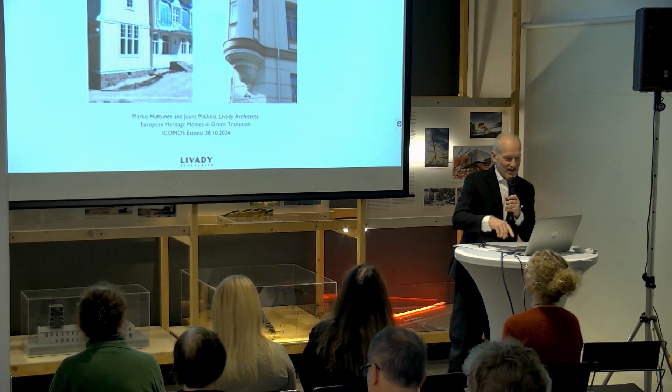Thank you, Henry. And also, thank you very much, Ulrika and Tina, for what you told about the legislation in Sweden that covers pretty much Finland as well. So we don't need to go through all that, but a little bit about the legislation anyway on ventilation in Finland at the moment.

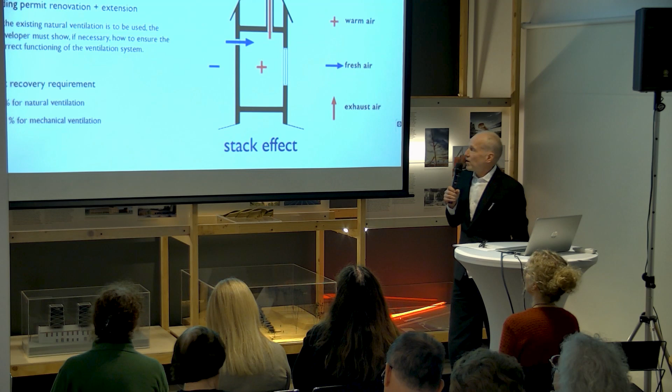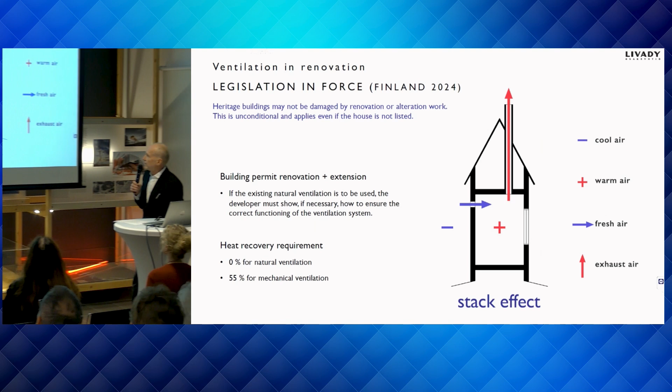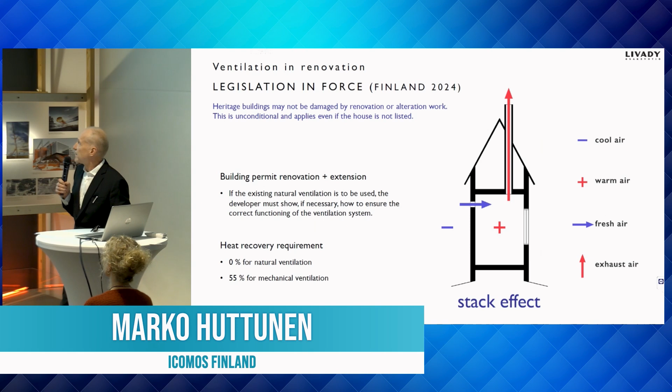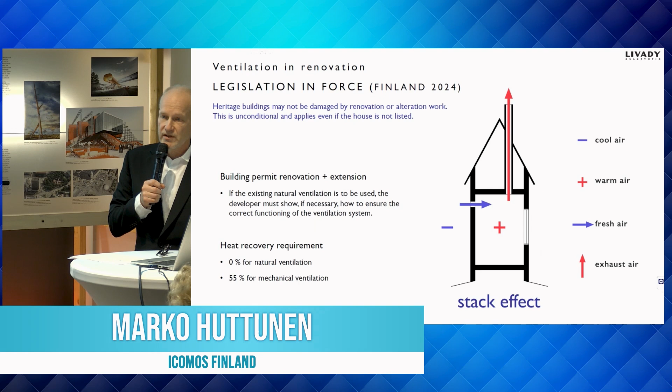Maybe first this graph here. What I mean when I'm talking about natural ventilation is the ventilation system based on stack effect. That means the air starts to flow when there is a difference in pressure, and the difference is made with the difference in temperature and height. Simple as that. And that kind of system has been used in Finland until the 1950s, and it developed into quite a good system. Then it was forgotten for some decades, and now it's coming back again.

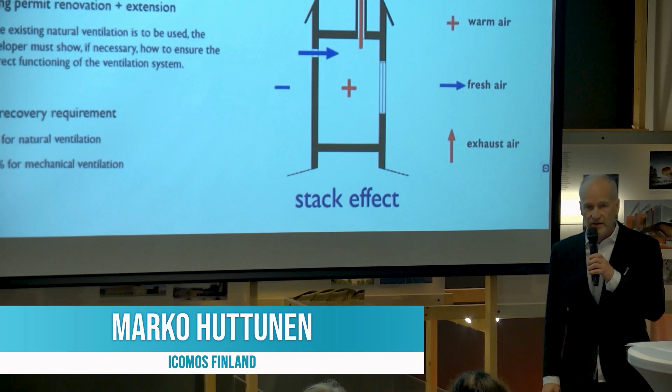And the benefits of this system are considered so high that, what we have here, maybe Sweden did not have, is this heat recovery requirement, 0% for natural ventilation, because otherwise it's considered such a good system.

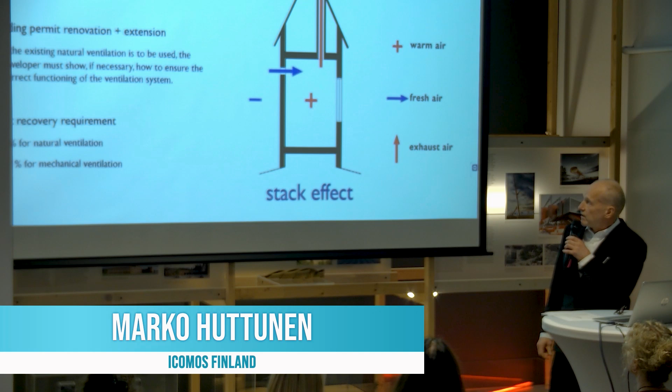And then there's a bit more legislation. So if you are doing a renovation in your building and it needs a permission, and if you have an extension, you can still use the old system of the original house. You probably need to show that the ventilation is working, but that's all. And there's no heat recovery requirement for the extension either.

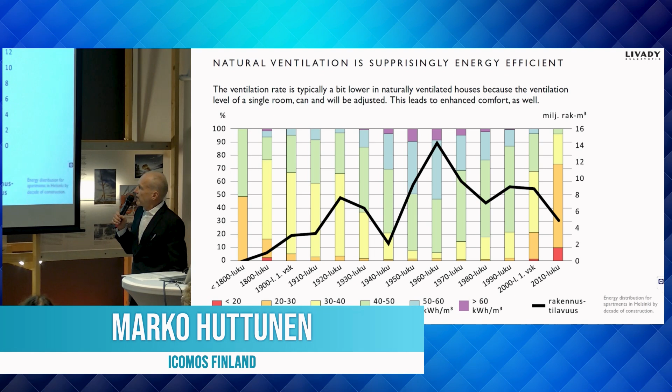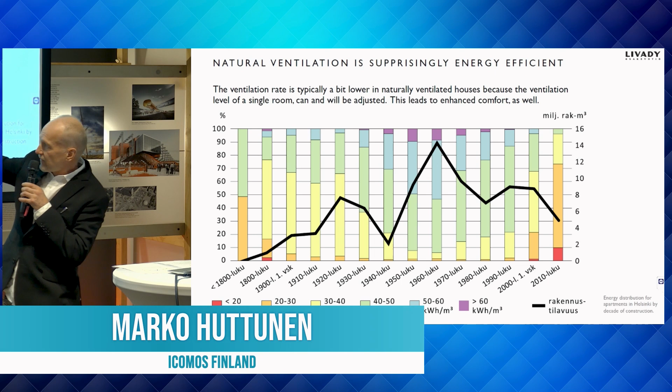This graph here shows the buildings in Helsinki. If you look at the black curve, it tells you how many buildings have been built in each decade, and you can see that most buildings we have are built in the 1950s, 60s, 70s. If you look at the colors, they tell you how much energy they actually use - that's not calculated, that's the real use. What you can read there is that these buildings that we have most also use the most energy. And if you look at the heritage buildings, they actually are quite energy efficient already - we are reaching that energy efficiency just now again. So they are quite good.

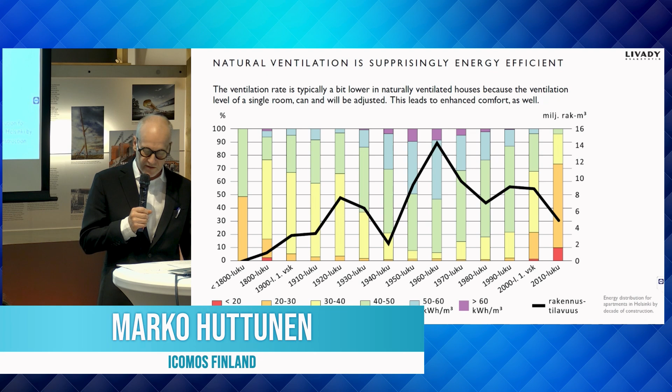And natural ventilation is surprisingly energy efficient. I guess that lies on the fact that when the cool, fresh air comes in, it makes the users turn the valves down, resulting in more appropriate ventilation. And this kind of control by the occupants also leads to enhanced comfort, which is of course very important as well. Whereas in mechanical supply exhaust systems, unnecessarily high airflows are usually not noticed.

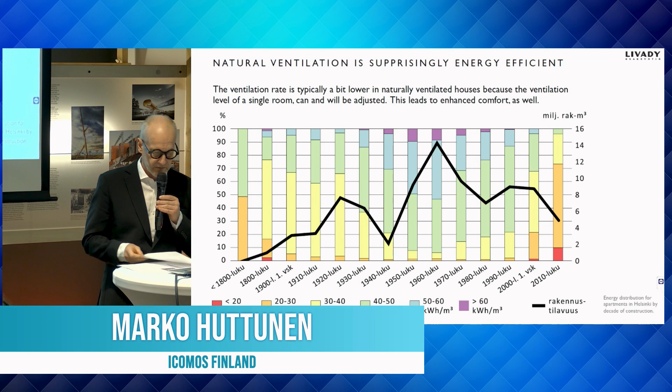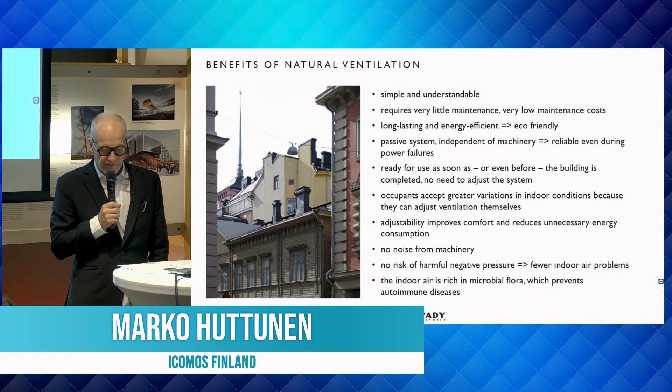Benefits of natural ventilation, they are many, and you can look at them there - I won't go through them. We think that energy efficiency should also be considered as a question of long service life and resilience, and I think, as we all know, a long-lasting building is always ecological. The longevity, fault tolerance, and maintainability must never be compromised, whereas in mechanical ventilation systems they often function incorrectly, need constant professional maintenance, and remain short-lived.

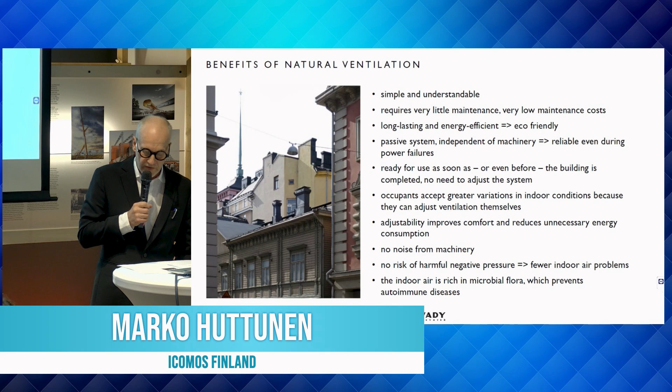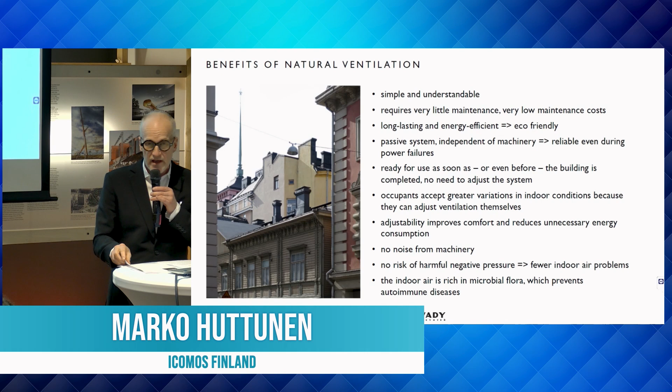And for these reasons, when we design houses - especially when we are designing dwellings or residential buildings - we use only natural ventilation, because we find designing mechanical ventilation irresponsible in these cases. Designing natural ventilation requires expertise, but luckily there is a wide range of positive experience, good examples, and now also some handbooks. And now I let Julia go to our topic: restoring heritage homes with natural ventilation.

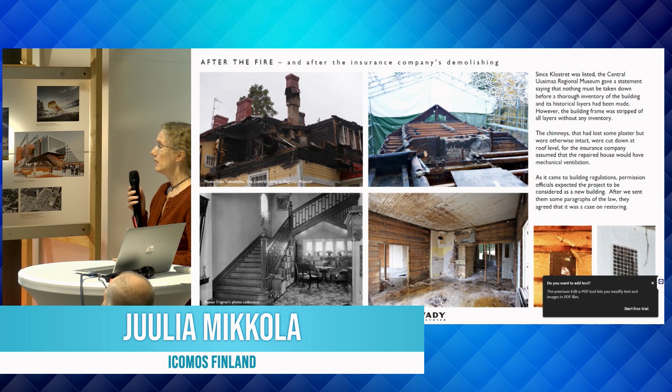And then renovated. The house was listed in the town plan, and hence the responsible museum gave a statement saying there must be a thorough inventory of the house, but that didn't happen. Instead, the house was stripped of all the layers that there were, and the chimneys that had only lost some plaster in the fire were cut down under the roof level because the insurance company was sure the house was to have mechanical ventilation.

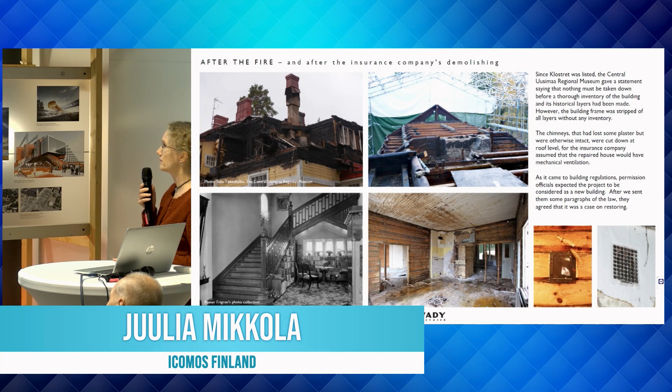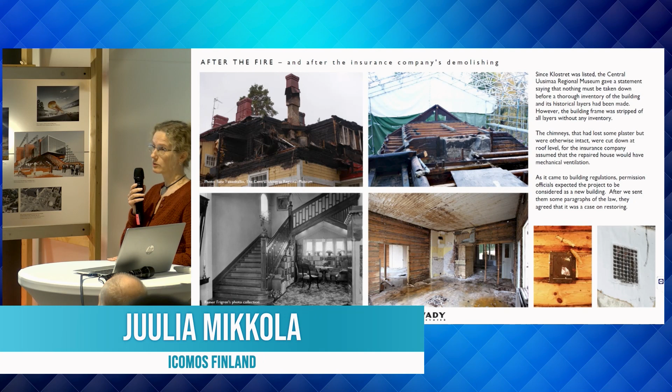Here we can see how the house was originally and how it looked after the fire. We had some problems with the permit officials because they were at first saying this is a new building when it's repaired. Then we sent them some paragraphs of the law and they agreed it's a case of repair.

The principle in ventilation was that we kept the original room-by-room system and improved it by making new openings on the walls, taking care that every room got enough supply air.

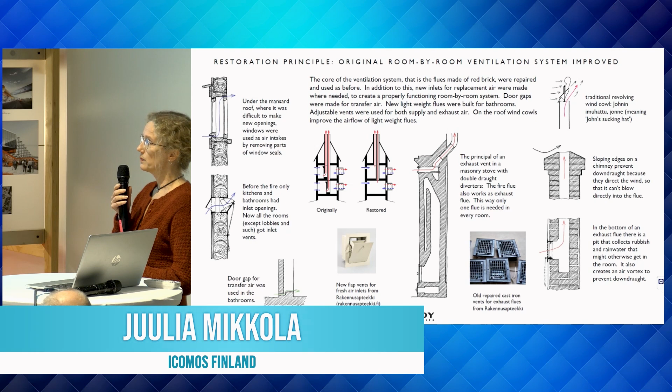We were aiming at having old-fashioned or traditional flap vents in every room, but there were some rooms under the mansard roof where it was more difficult to have vents. So we used the windows as a kind of supply window system, leaving out pieces of window seal.

You can see how the system was originally. Every room had a fireplace. When the house got central heating, some of the fireplaces were taken down, but some were still left. The traditional way is to have only one flue for every room except kitchens.

Here we can see in the drawing the principle of a fireplace used also for exhaust air. The fireplace has double draught diverters and a vent for air in the upper part of the oven.

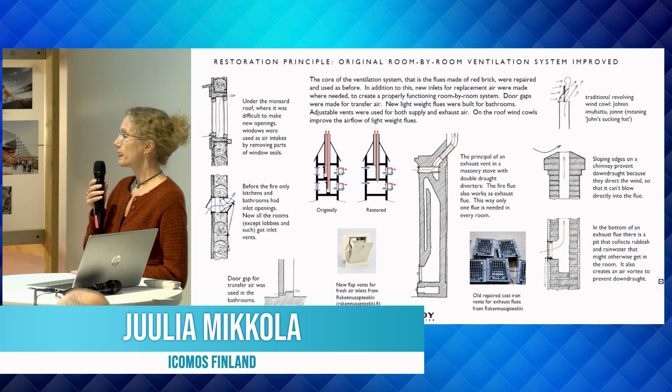The flap vents used for the renovation were new, but at the time we couldn't buy proper exhaust vents, so the ones we used were recycled from older buildings.

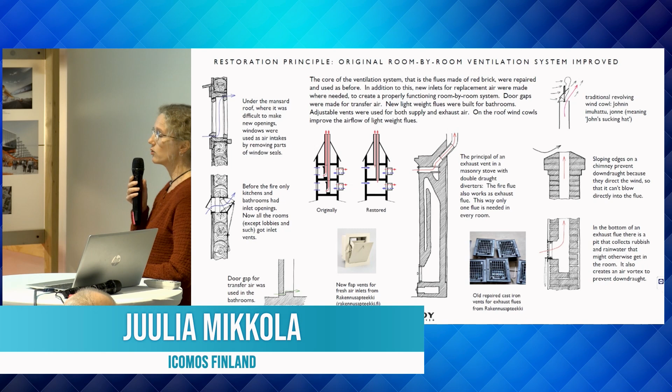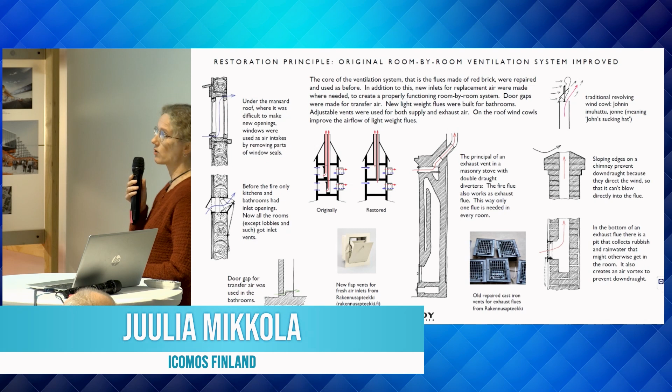On the right you can see what was done with the flues. The chimneys that were bricked up again were using the old shape and the principle of directing the wind so there would be as little downdraft as possible. The flues were to have pits that collect rubbish and rainwater.

With the floor plans, we tried to combine all the rooms that were divided earlier to make good-sized rooms, having an old brick flue for every room. We also made sure we were using every flue there was already in the building.

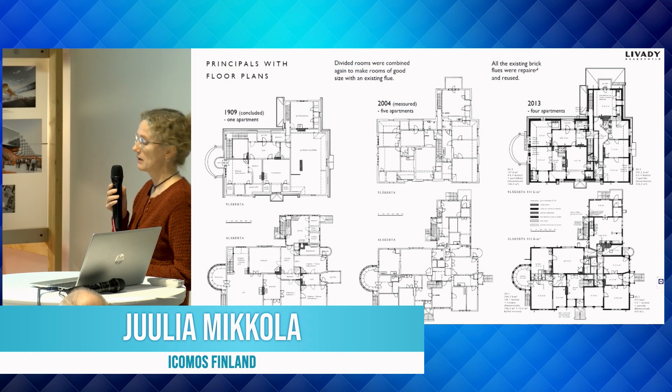For bathrooms and such, we had to build new lightweight flues. Here you can see drawings of the chimneys and the chimney stacks.

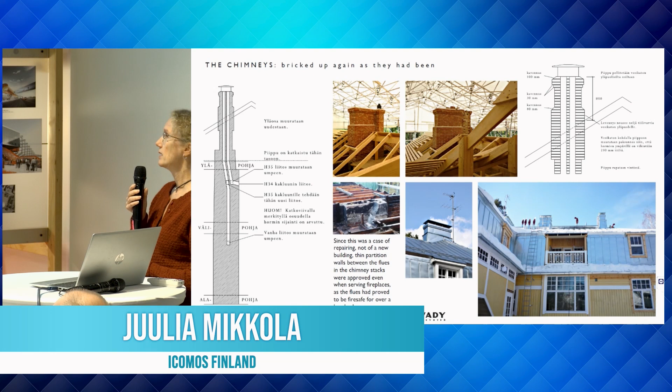Since this was a case of repair, we didn't have to follow the fire regulations exactly, because the old thin partition walls in the chimney stacks had proved to be fire safe over 100 years.

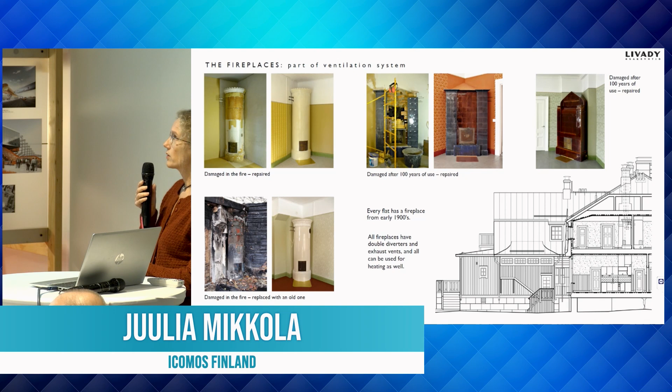Here we can see the fireplaces that were and still are part of the ventilation system. Most were repaired. One was damaged so badly that it was replaced with an old fireplace.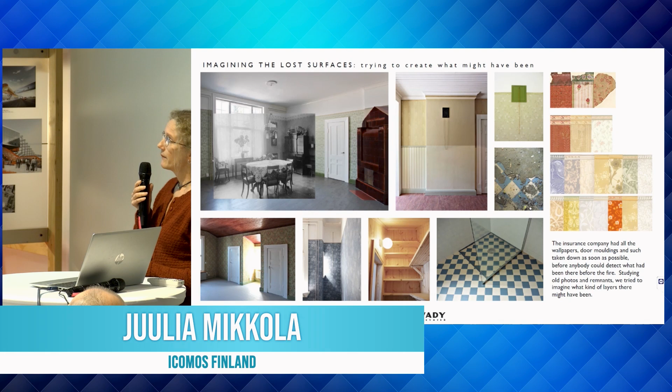Because the house had been stripped of all layers, there were only small remnants. We tried to create the feeling, imagining what might have been there in the house originally.

This is the second example. It's a stone house, built a bit earlier, finished in 1880. It was built by a wealthy merchant to be his home, with a shop in the corner, and a restaurant and wine shop in the cellar.

The house went through a lot of changes in the 20th century. In 1959 it was turned into a department store, and all the windows were changed. You can see it looked quite different.

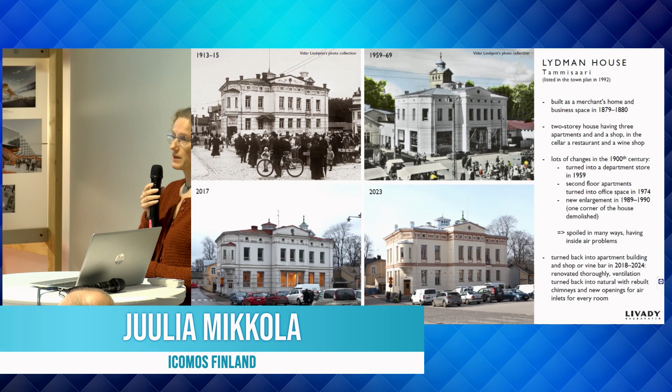Then it got, luckily, a new owner that wanted to make it apartments. Again, it had been office space and shop before that. It was renovated thoroughly, having again natural ventilation.

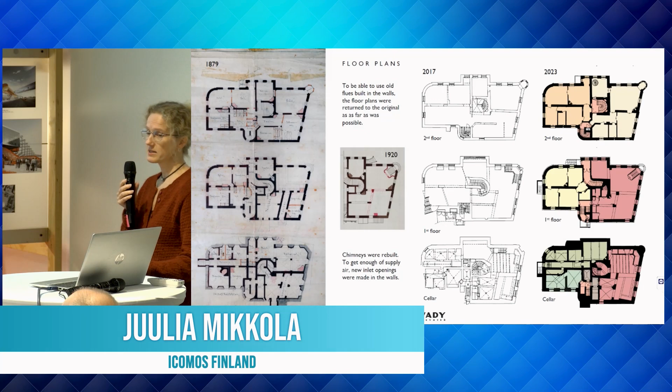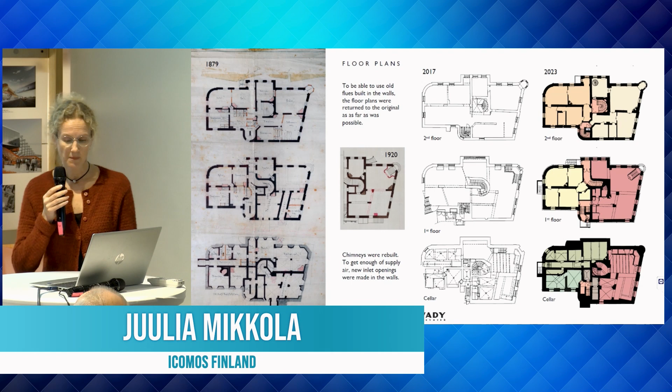Here we can see the floor plans, and in this case we were building back the walls that had been there because the spaces had been more opened than divided. The old chimneys were rebuilt to create again a room-by-room system.

This house originally had no inlets, so they had to be made for every room. The shop was designed to also be able to work as a wine bar for 30 people, so the business space has 6 flues and 6 inlets.

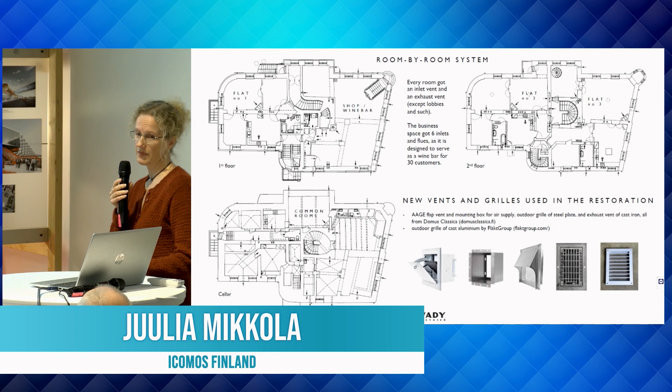At this phase, we were able to use new vents and grills. The exhaust vent looks exactly the same because it's made after a tradition, but it's completely new. It's of cast iron. Close to the ground level, we used cast aluminium grills that look quite much as the old ones that would have been of cast iron.

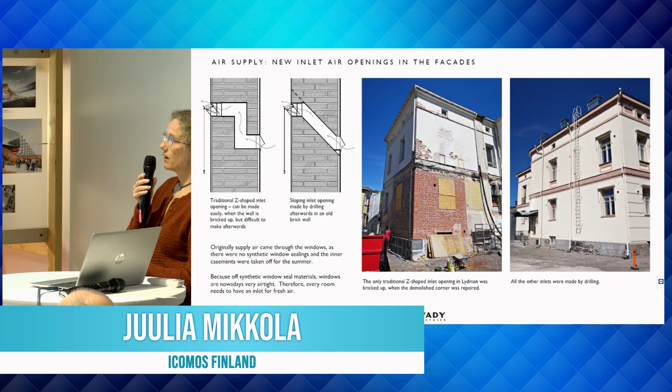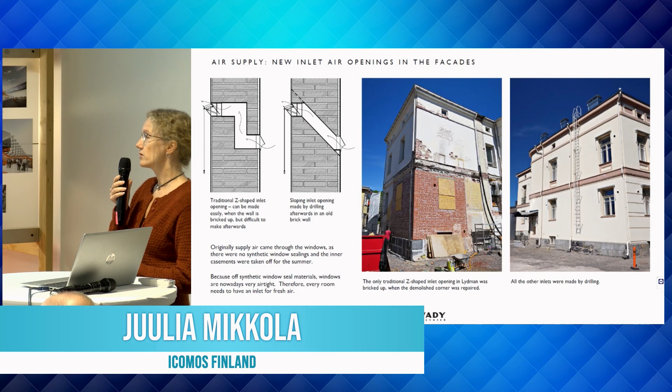On the left, you can see a traditional Z-shaped air supply. This kind of opening in the wall is easy to make when you're bricking up the building, but when working with an old existing wall, you have to drill the holes so they look a bit different. In the building there was a corner where an enlargement had been demolished, and there we could make one of these old-fashioned inlets, but all the others were drilled on the facades.

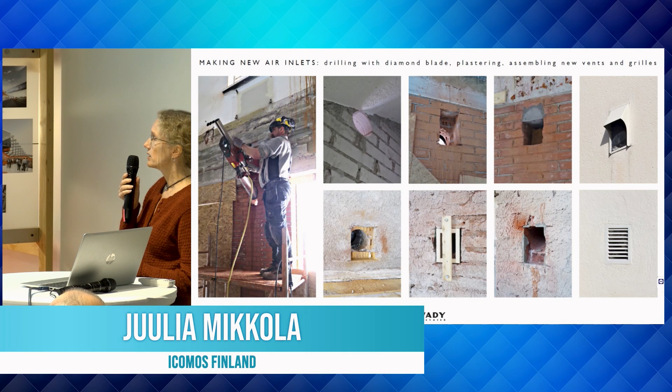Here you can see how it happened with a huge machine having diamond blades. There are many phases: first the round hole, then you make it rectangular on the inside and outside, make some patches and render it, and then assemble new grilles and vents.

Here we see the original system not having any proper inlets. Actually the windows, in the old-fashioned way, worked as inlets because there were no synthetic window seals, so every room got supply air through the window, either unintentionally or by opening it. When the house was turned into a department store, it got mechanical ventilation with only exhaust.

At that time most of the chimneys were taken down, so there were only 6 left when we started to plan. The remaining chimneys were in very bad shape, and the original crowns had been taken down and replaced with a concrete slab.

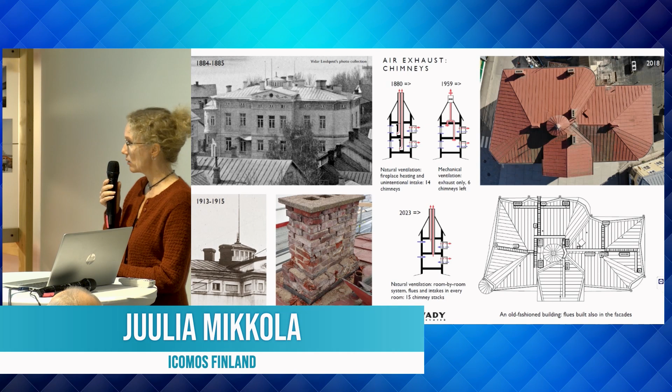Again, we designed a room-by-room system with flues and intakes in every room, and built back chimneys so that now we have 15 chimneys in the building.

The old flues were studied carefully. The green color shows which part might be used again. Mostly they were in rather bad shape.

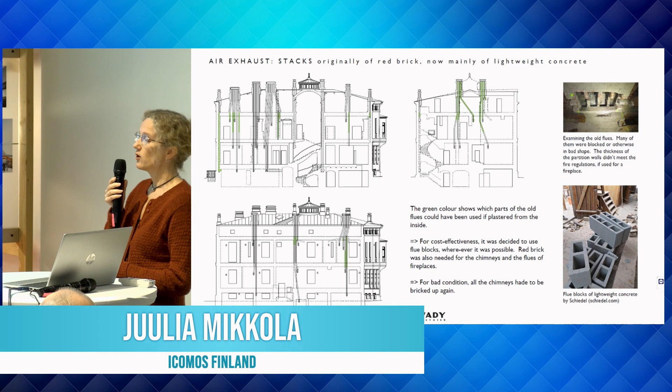For cost effectiveness, it was decided not to use red brick, which was my first intention. Instead, we used lightweight concrete flue blocks.

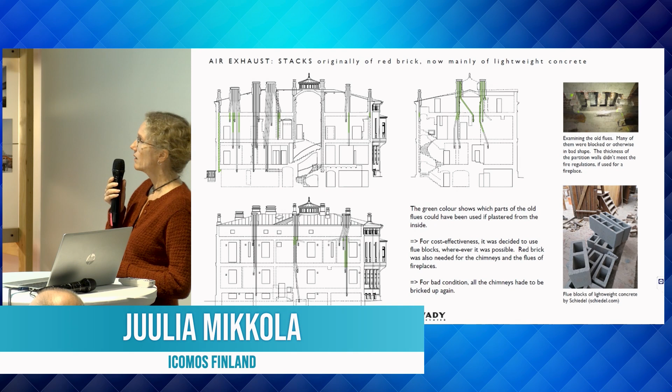Of course, we had to brick up the chimneys again. Here you can see the flue blocks built into the house. First, space was cut for them in the walls, and then they were bricked up, coming through the walls.

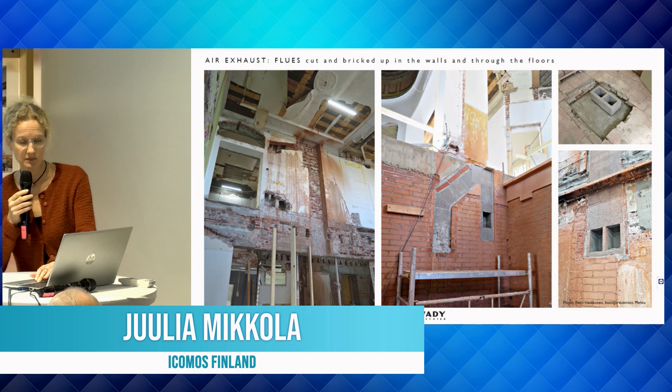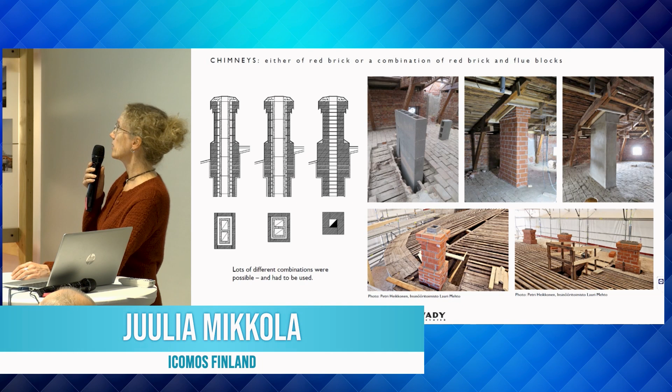Then for the attic and the roof, they had to get a red brick cover, or mantle. Because of the different shapes of the stacks, many different combinations were used. Because of fire regulations, the chimneys were plastered in the attic if they had fireplaces.

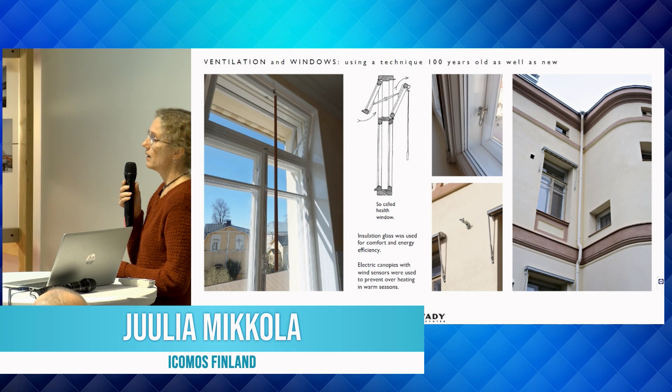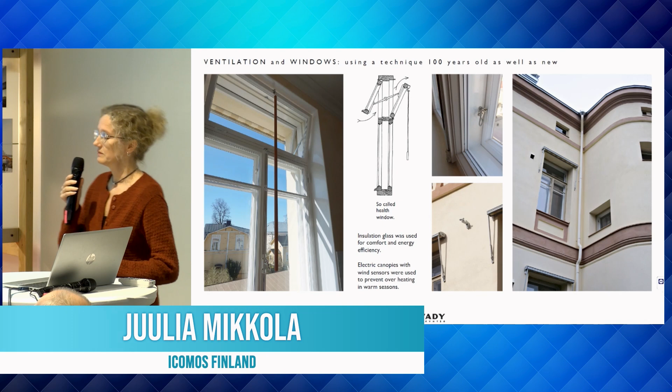We also used traditional health windows on the sunny sides, along with electric canopies with automatic wind sensors, to make sure they won't break in the wind.

So this house was also restored from ruins to be used as apartments for maybe another 140 years or so. Thank you.